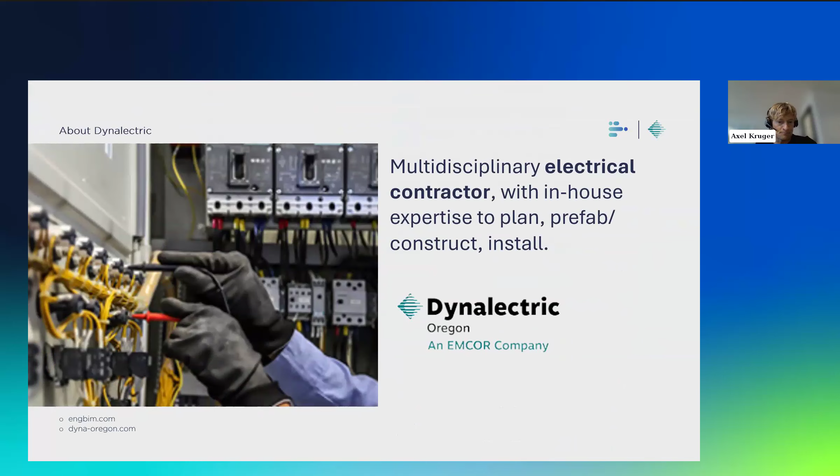And then going to Bruna and myself, I'm Axel Kruger, and we're both part of ENG. We are a BIM company. We basically help MEP contractors acting as their VDC department, augmenting their in-house VDC by modeling, coordination, prefab, and install deliverables.

We're about a little over 500 people right now. Been doing this for quite some time, and we are pretty much spread out across 15 different states.

Been partnering with Dyna for a little over 3 years now. Our partnership has really become more than an extension of their VDC team, more of an integrated part of their virtual construction team. So Bruna and Evan will be introducing themselves, and I really hope you enjoy this presentation.

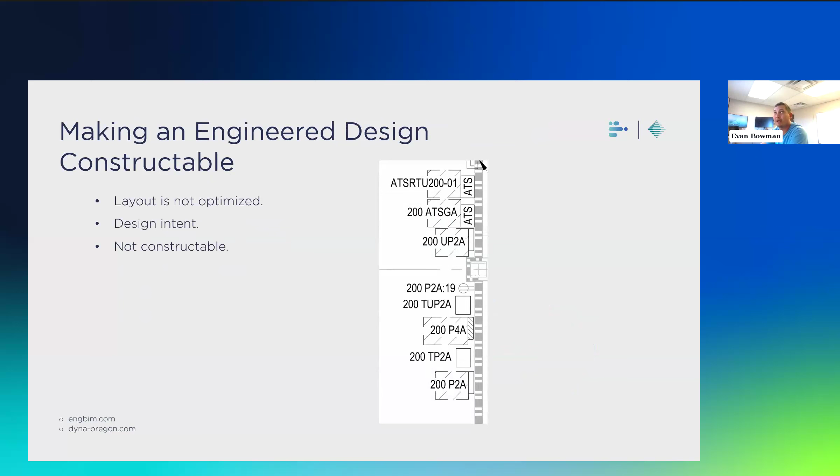This is where I like to start. I want to start with ideas from the field because it's going to be for the field. They are the end user in the grand scheme of everything, and they have a lot of great ideas and concepts because they've had to make these installations before. So I always start with the field guys. We come up with ideas, we do some brainstorming. How can we make this better?

Once we get that idea, when we are designing the concepts of it and digitalizing it, I want the field teams to be putting their input in. Doing that also gains that buy-in from them because they're putting their stake into what you're designing. They have input, they have their stake, they're going to buy into it and want to push for it. Plus, any questions that I might have are answered almost immediately. I don't need to write an email or anything to get that.

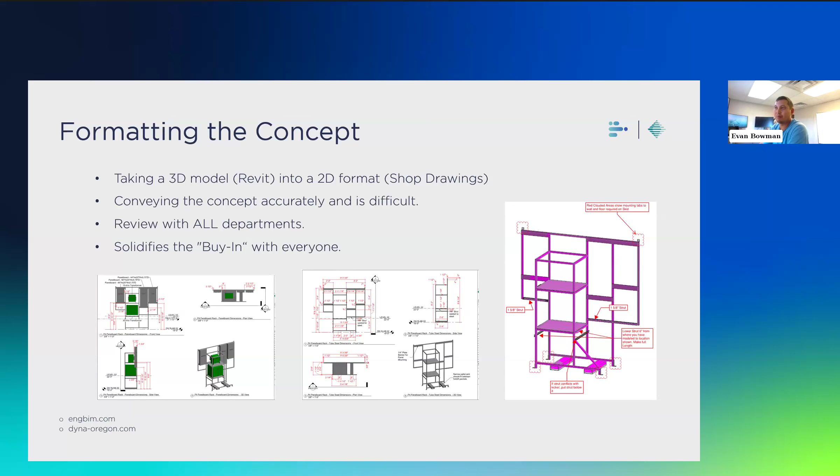These drawings and these concepts need to be reviewed by everyone, the prefab teams, the VC teams, and the field teams. That way everybody buys into it and everyone has their input and stake to it before it even starts getting built. And it's very good to review all that.

So once we get to building it at the prefab shop, people at prefab should always be in direct contact with both the VC teams and the field. Have weekly meetings about how it's going, that way questions get answered, maybe there's a dimension missed again or something. And then if you can, take those teams and do an on-site visit so you can actually see this thing being constructed. You can physically touch it, make sure it's the way that you were anticipating it coming out.

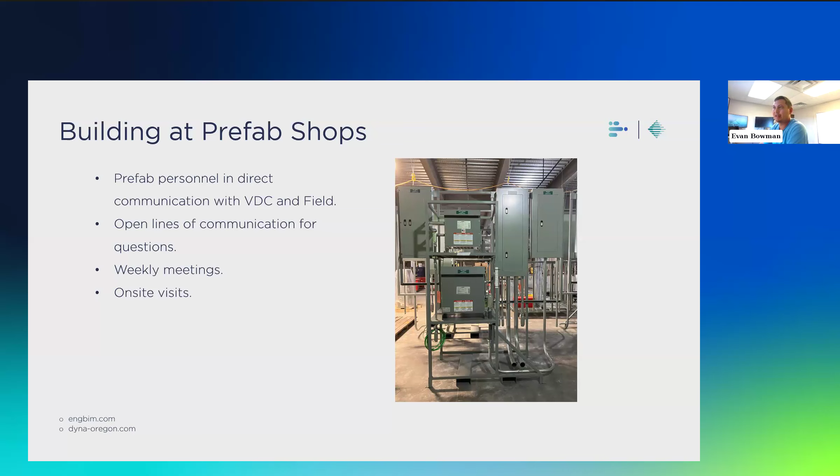Before it comes to site, we always make sure that the layout is good with the installation we're going to make. So the field teams will verify that what we have here is good, it's going to fit, that way we don't have any unforeseen things show up. Maybe something got adjusted in the field and we didn't account for it. So we always want to make sure that this layout and installation is going to happen before this thing comes out.

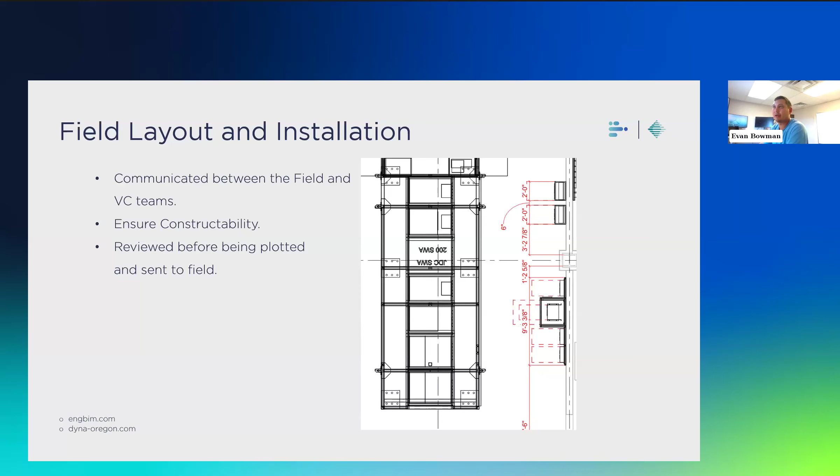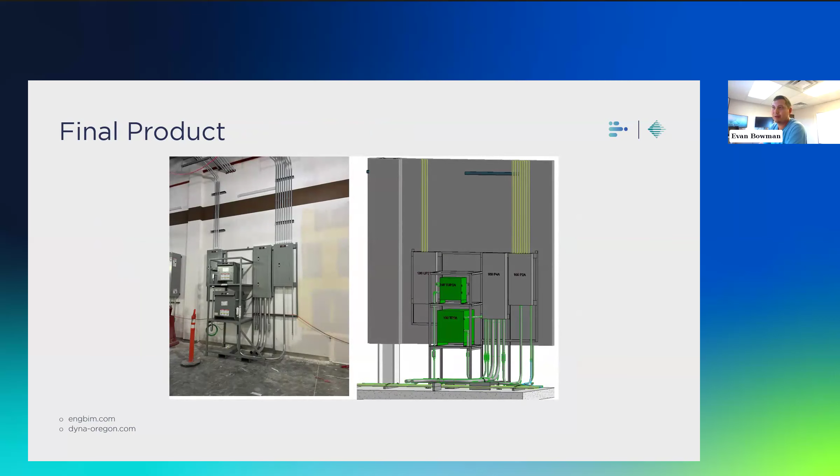And here's our final product here. So we went from this design, this concept, turned it into something physical, brought it out to the field and installed it, and this is what we got. We were able to even as-build the conduits because we were on site as to what was coming in, any kind of changes they made. And we were able to incorporate that back into the model in real-time as-built, that way we could get that information quickly.

With real-time as-builts, it's very important to have someone in that live flow of communication, because it's way easier to do these as-builts during construction than after. We're encountering that on other sites too, having to do scanning and capture what has been done because the as-builts weren't happening in real time. If you can get those as-builts to the engineering firms, they'll be able to incorporate your design, if they liked it, into the next phase.

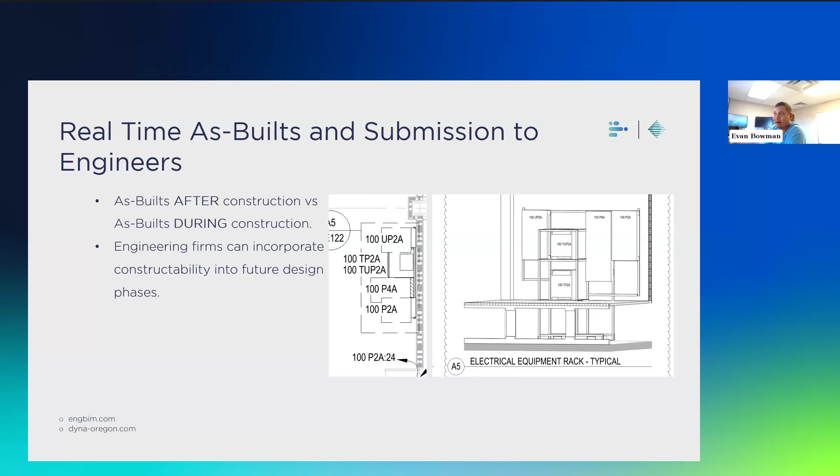What we're seeing here is, if you remember from the first drawing, they had all that equipment scattered all over the wall. Now they've condensed it, taken an idea, and designed something more constructible, already planning for it ahead of time. So it makes our job really easy going into the next phase. It was really awesome for this site to see, we came up with this idea and now here it is being implemented on the next phases. It was really great.

So Bruna's going to talk about some of the as-builts she's done and some of the things she got to see when she was remote versus when she came on site, and how clear that communication got for her with the field and the VC team. So go ahead, Bruna. Thank you, Evan.

Yes, as you were saying, from the virtual construction side, we work with many projects with different phases, and we need to adapt each phase to how we communicate, whether remotely or in person. I've been working remotely for a long time, but this year I got the chance to be in the field and engage with the project from a different perspective. We kept using digital platforms and collaborative tools with the rest of the VDC team, but I was also able to join face-to-face discussions and field meetings, which gave me a big experience on how the field team and the prefab team work and operate.

Most of the time, we are not only taking care of a single scope. We have so many service types included that we can develop 3D electrical templates and apply filters to different electrical deliverables. But down the road, we always receive new requirements. We have project constraints, RFIs that we should change, and we need to be flexible and adapt our model to this new scenario. And if we don't keep our communication and all this information clear, we can get lost with the variety of work that we take care of.

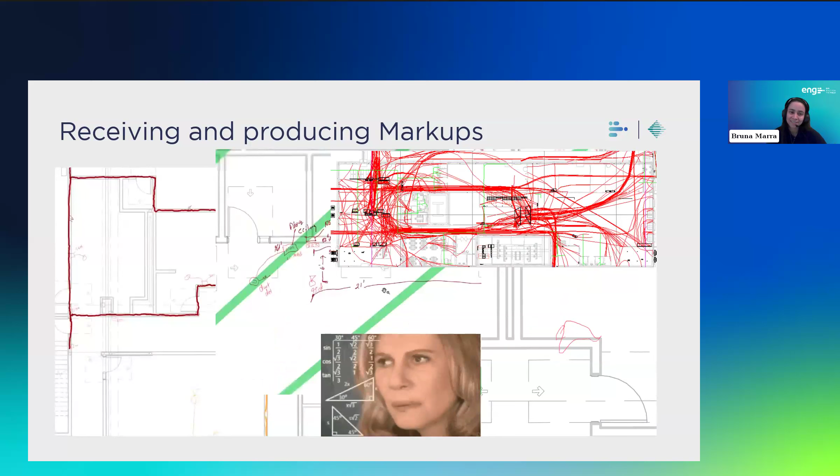Well, all of those are the challenging ones. And usually that's my face when I receive a markup like that, because it's difficult, guys, I need to be honest. Sometimes it doesn't have an orientation, or it doesn't come with a legend. We can't know for sure which supports they are going to use to install certain conduit. Yeah, this makes the VDC world very challenging.

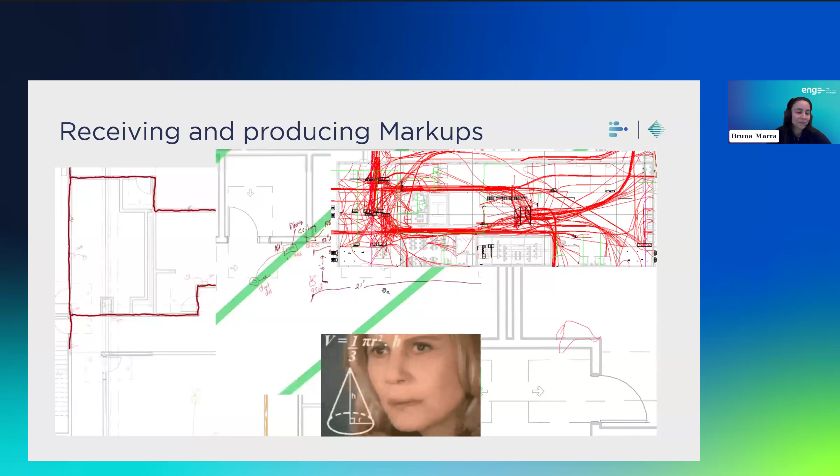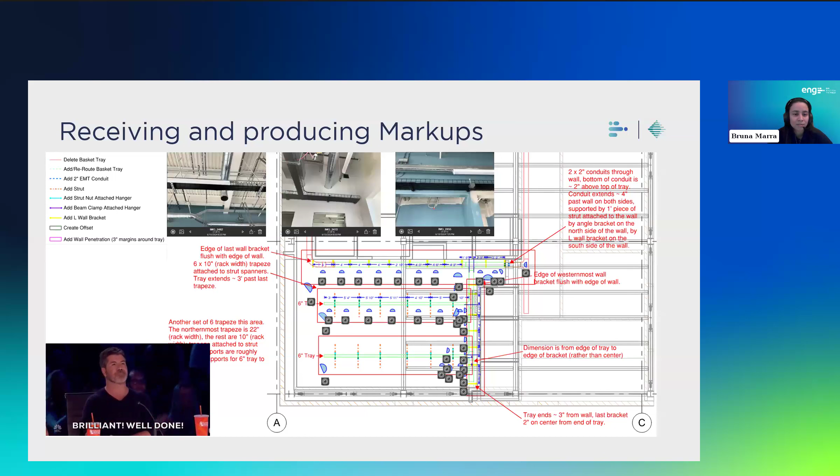But on the other hand, I also brought a really good example. This is one of the markups we love to receive. It has a legend, pictures, descriptions, and even the orientation of where the photo was taken. And sometimes they want to differentiate: this will be installed through the wall, or this will be through overhead systems. I know sometimes it takes time to develop a markup like that, but from our experience, it pays off considering the amount of time you'll save with rework or missing information that the modeler would otherwise ask you again before you resend the markup.

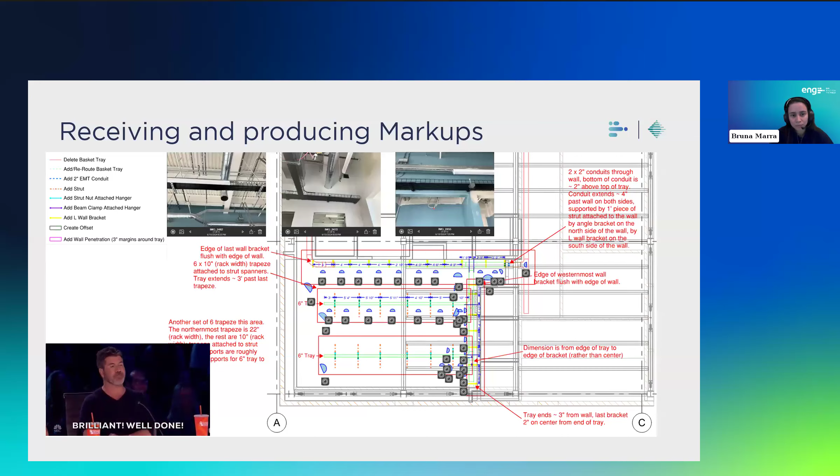So usually when you spend more time preparing those kind of markups, it's really useful for the entire VDC team. I brought here a few other examples of tools that we've been using quite a lot.

I know most of you know how to use Bluebeam Revu, and I just want to emphasize a few practical examples of usage. Layers is the first one. Usually we have different service types, and you can split the task or scope between different layers and assign each layer to a specific modeler. For example, one will take care of branch, other will go with lighting fixtures, and this is a good way to keep the work organized.

Also, captures - this one was from someone from the field who showed me how to do it. Basically you can add extra information to your PDFs, and show, for example, the overall structure, if there's a column you should avoid, or any site conditions we should be aware of.

It's really useful. And the other one here is flags. I think all of you might remember some contract documents that have 200 pages that you need to take a look at and revisit every time. With flags, it's simple to go straight to the page you want. Sometimes you can highlight the panel schedule pages or the single line diagrams.

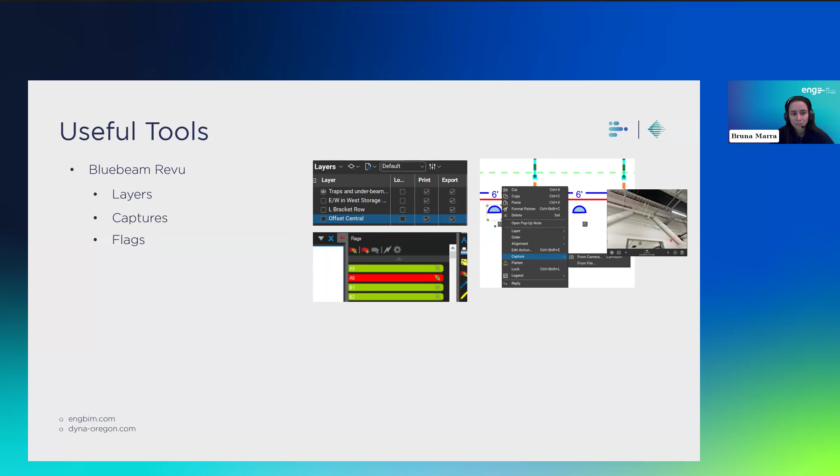The other one is the overlay pages. Sometimes you receive revisions, and I like the overlay option because you can have a nice visibility of the changes.

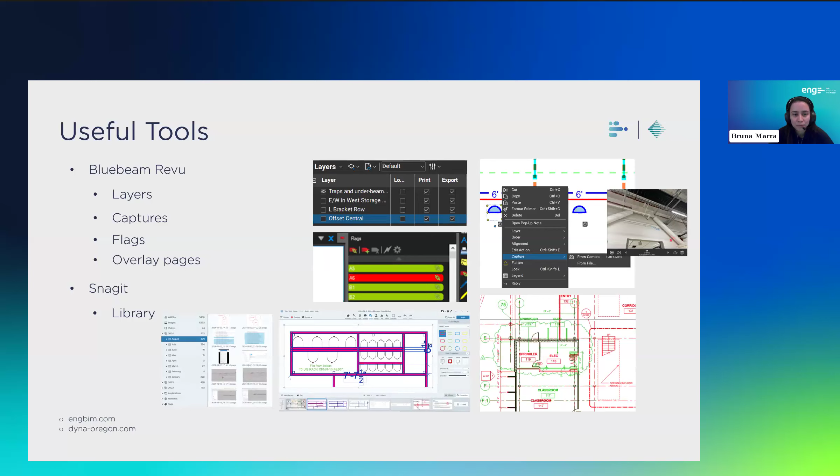And the last one I brought is Snagit. Snagit is a tool for high quality screenshots, and what I love about it is that it keeps a library with all the records of your screenshots. I can recall, for example, multiple coordination meetings where I had to take a lot of annotations, taking screenshots and adding bullet points. Through Snagit I can revisit these in a good way, and it keeps everything organized per date, per type of file. So it's really nice.

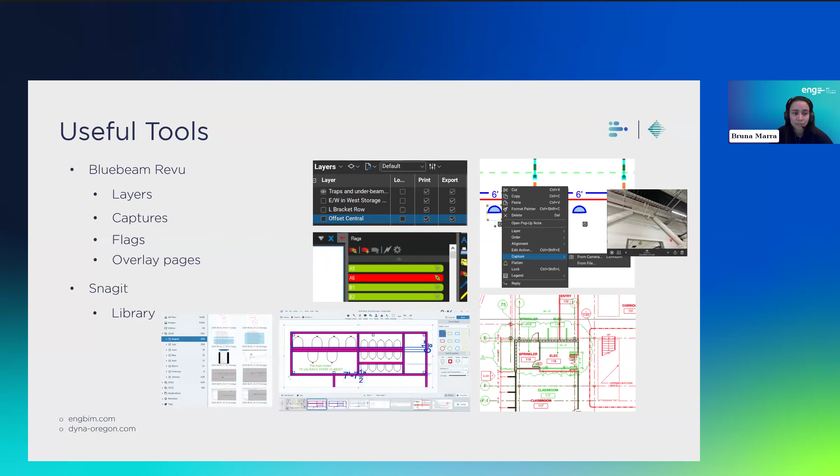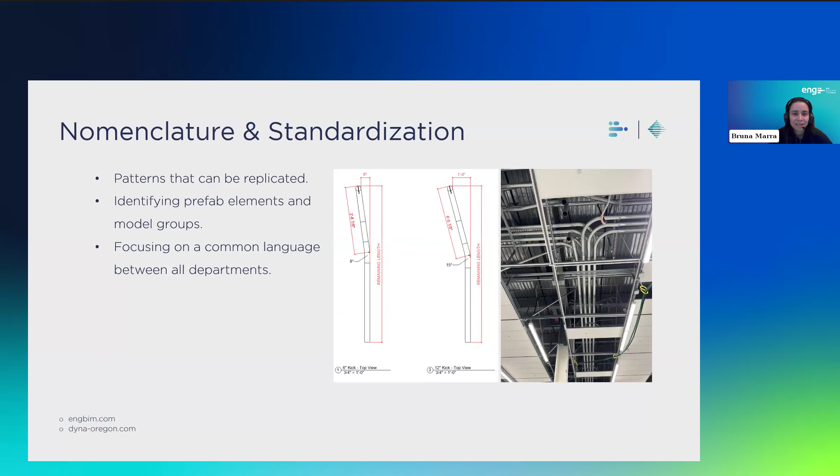But after a conversation with the field, we came up with an idea: what if we call these elements KL6? That means it's a kick that turns to the left, and we have 6 inches for the rise dimension. By doing this, it's much easier for the guys installing these elements to identify which is their scope, instead of CDNT level 2 type 1. So this gets much more intuitive, and it's a nomenclature that is field-oriented.

When sharing information with the VDC team, I really like to divide the scope with different models and try to compile all this information in a single file. We've been using Smartsheet a lot, and it's good because you can add attachments, descriptions, even comments, and set up priority for each task. This has been great because all the modelers can revisit this file and update their status, whether it's a work in progress task or ready for review.

Another tip I brought is that sometimes it's really important to set up this initial area of work. I know sometimes we have huge data centers with 30 areas, and if you first have a call with the modeler to review the first region, and maybe regular catch-up calls to check their progress, that also saves a lot of time because you can make sure he's up to speed with his queries, can come straight to you to clarify, and keep going with the same quality for the rest of the building. So yes, I really recommend having regular catch-up calls.

For keeping the work organized, we need to have a consistent folder structure. For example, with the VDC world, we have drawings that are ready for review, drawings ready for prefab or installation, and even drawings after RFI changes that we need to as-built and make sure the changes are covered. It's good to have these organized in a proper folder structure because otherwise you can get lost with all the revisions and updates.

This is where real-time communication brings a lot of valuable input, which is the as-built changes. These pictures show an area full of branch conduits in a GSN room. From being on site, we have the advantage that sometimes we need information from the field, and they might be busy with other scopes or reviewing another area. But being in the field, you can also help them with these updates and changes.

Sometimes I can go straight to that room and check, okay, does this match with the Navis, with what I have in the Revit model, does it match with all the drawings we have? This allows us real-time monitoring through these field walks, which also helps a lot with the as-built deliverables.

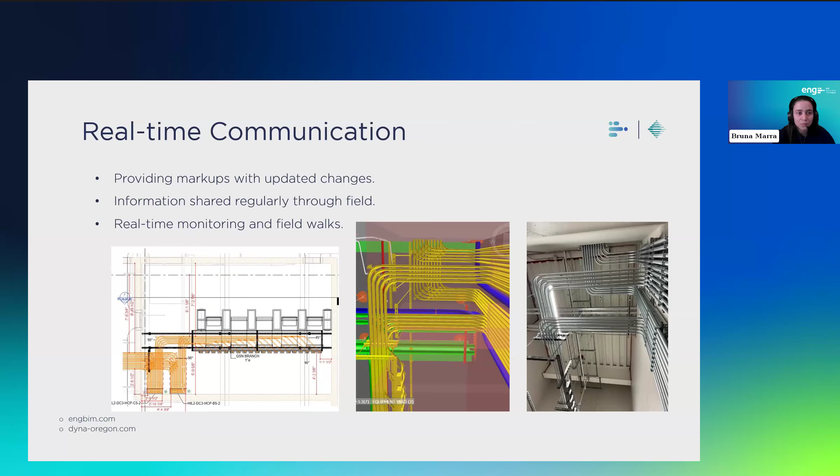Being there, you can talk directly with each of them, even the PM, the superintendent, or the guys installing in certain areas. We can check their thoughts, what ideas they have for improvements, and we can also help with any systems they want to learn how to use. Feedback is really important, and if you're in the field, you can do it with multiple departments, all focused on the same goal.

Yes, do you want to go ahead, Evan?

Sure, thanks, Bruna. So as you guys could tell, she was remote, doing all her work remotely, and it was difficult for her to understand a lot of the markups she was getting. But when she came on site, to the field, she was able to clear up those things because communication there was instant with the field teams and prefab teams. Any questions she had were answered almost immediately, and she was also able to help develop new strategies.